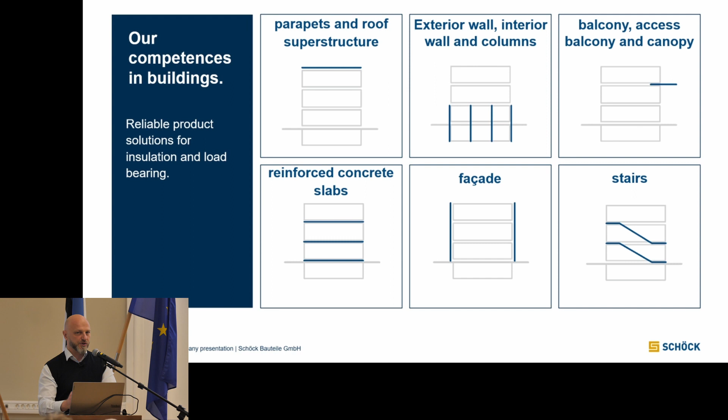The last gap which we closed last year is the product for thermal insulation of columns, where you don't need to wrap the column around with insulation material. You just put the thermal insulation element on top of the column, and that's how you separate it without needing thick walls. This was the last invention and the last product where we closed the whole thermal break issue around the house.

As you see here, we have solutions for parapets, for roofs, exterior walls - there are some examples over there - the facade, the stairs. For the stairs we have impact sound insulation. I don't know about the regulations here, but little by little, especially when investments are coming from Scandinavia, the demand for this impact sound insulation is coming.

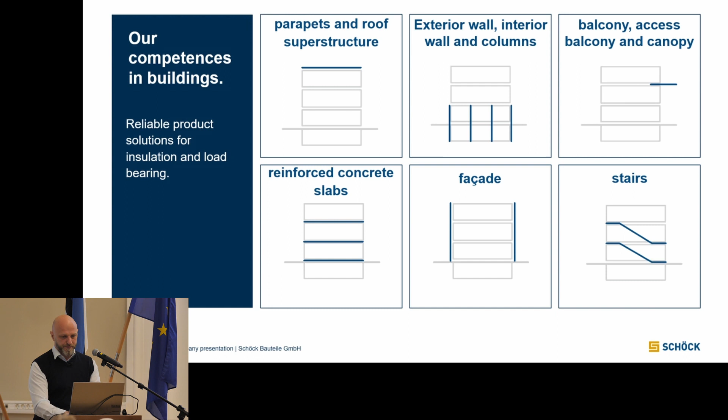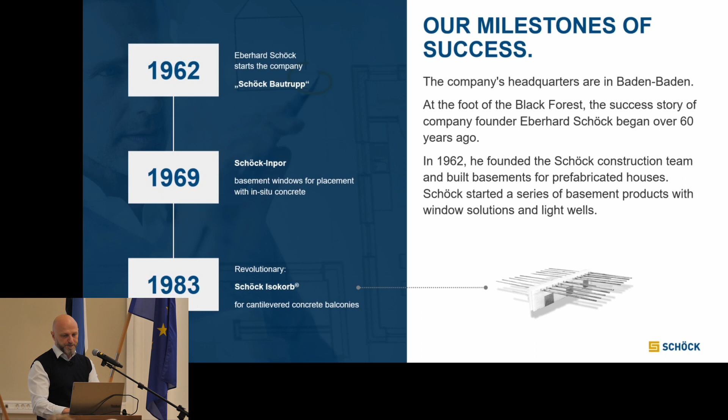In 1985, as I told you, another product group was created for impact sound insulation. At the beginning there were only a few products. Now the whole range has expanded, but I will come to this later on. Now we close the whole staircase and landings with our combination of products.

In 1997, the Schöck Combar, the glass fiber reinforcement, came onto the market. It was developed together with a Danish manufacturer. I don't remember the name off the top of my head, but it was the combination of our engineers and their know-how, and the product Combar was created. So you see, we have experience with fiberglass since 1997, so it's 25 years.

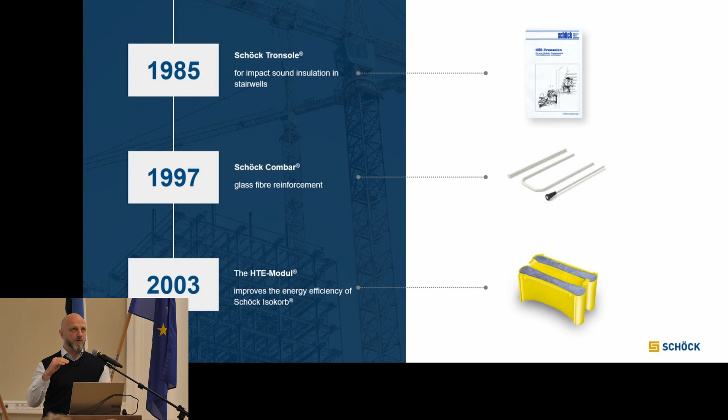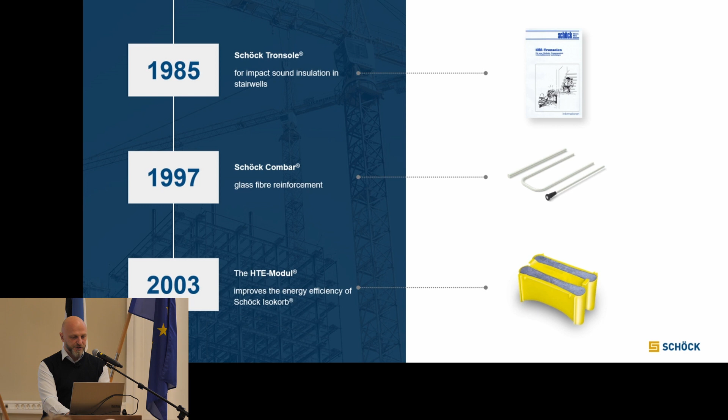Then in 2003, for the lower load-bearing elements, we no longer have the rebars at the bottom for the balcony connections. Now we have HTE modules. It's our invention, and maybe my colleague Carlos will talk later in his presentation about why and how it works.

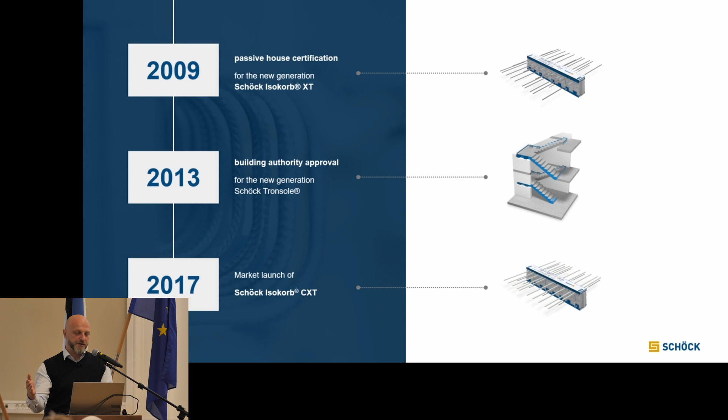In 2009, we got the Passive House certificate for the XT. XT and T are two different products, with 80 millimeter and 120 millimeter thickness. We got the Passive House certification for the 120 millimeter element. Then in 2013 we got the building authority approval for the Schöck Tronsole. And in 2017, the latest, 7th generation of thermal breaks for concrete-to-concrete balcony connections appeared.

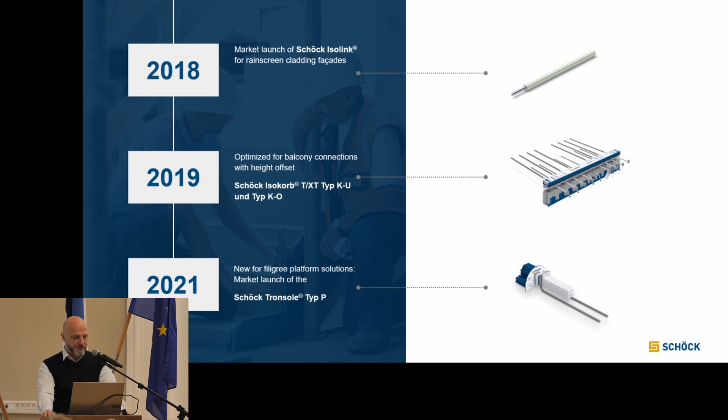In 2018, from the same material, Combar, we created Schöck Isolink. This is the anchor for rain screen facade connections. In 2019, another invention with short anchoring, which is very important if you design buildings or balconies next to hollow core slabs. And in 2021, the Tronsole Type P for impact sound insulation came onto the market.

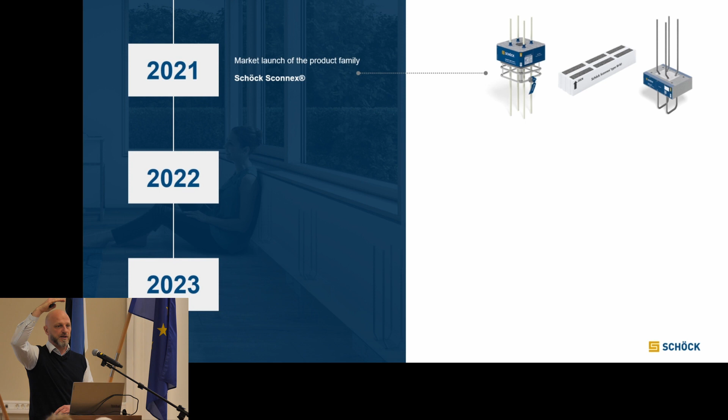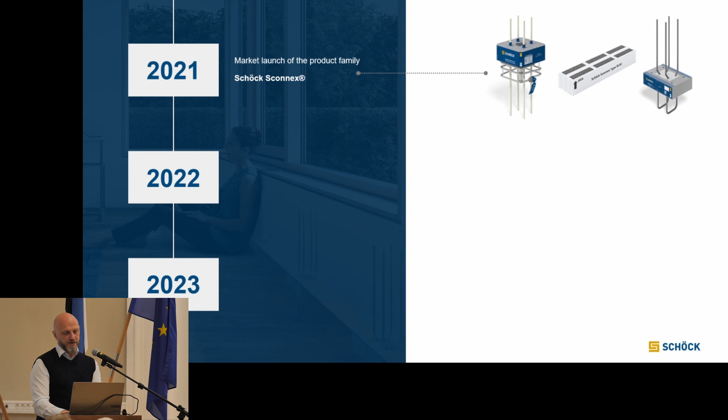As you see here, this product was the latest invention. This is for columns. It separates the column from the ceiling; you just disconnect. It has a Passive House certificate as well, and it belongs to the Sconnex product group. I would say this is something new that you will see.

During the company's existence, sales and production have expanded far beyond Germany, and now we have core markets: the DACH region, Germany, Austria, and Switzerland, plus France, Holland, the UK, Poland, Italy, and the USA. All the other countries are growing, and maybe some will turn into core markets as well.

Certifications are essential if you want to ensure product quality and be able to sell to different markets. As you see here, one of the most important markers is CE/ETA. Our thermal breaks for balconies, cantilevers, and roofs are covered by this certificate. All the guidelines are followed, and all tests were made and successful.

From the Passive House Institute we have two kinds of products: Passive House certified products and thermally efficient products. One has a certificate, the other has confirmation that they are energy saving elements. Another important thing: I believe some of you design projects in Scandinavia. They now demand the EPD certificate, and as you see, we have it as well. So if the customer demands it, it's here.

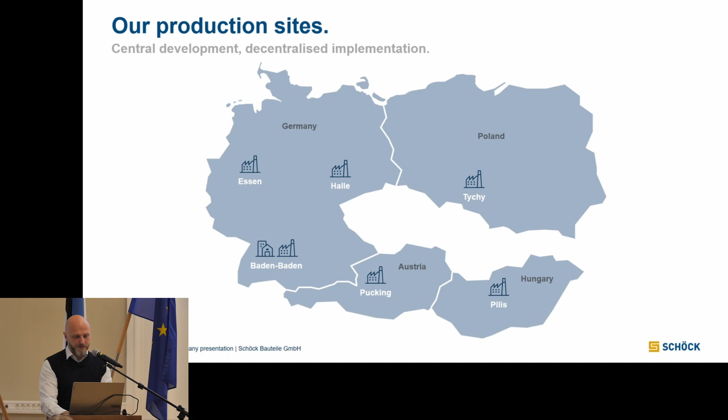Our production sites. The thermal break elements are produced only in Germany. The shear dowels and punching shear reinforcement are produced in Hungary. In Poland we have only assembly. All the elements are supplied from Germany, and according to the customer's needs, they are put together.

So what challenges do we face? Since 2021, the low energy standard of the EU building efficiency directive applies. I know you have a little more freedom here in designing and adopting solutions, or using site solutions, combined or welded on-site. That's not the case in Lithuania anymore. But the requirements are slowly leveling out, and everyone is starting to pay more attention to durability and sustainability. We believe this is the future for everyone.

Two-thirds of a private household's greenhouse emissions are caused by heating. Yes, we should protect the environment, but nevertheless, there are other important topics to mention. As you know, the price for oil and gas, and energy in general, went up. And one of the solutions is to reduce the heating to 17 or 18 – not a solution, recommendations, I would say. To reduce the heating to 17, 18, what does it mean structurally speaking?

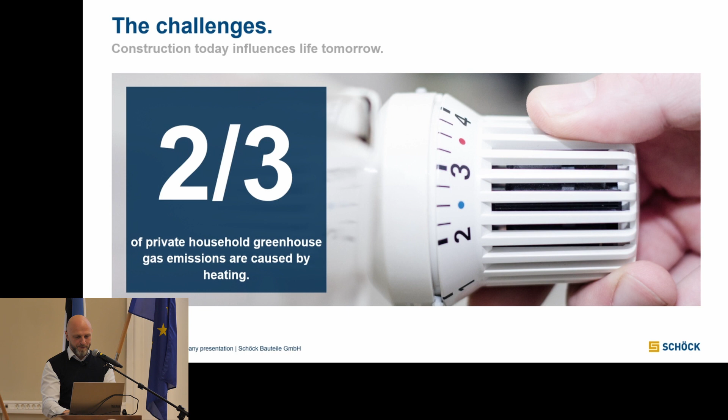The cold bridge stays not that far from the wall. It comes a little bit inside the wall, and we have the dew point closer to the ceiling, and we have, let's say, more problems when it comes to cold bridges, because the whole temperature level is reduced and the cold temperature comes into the building.

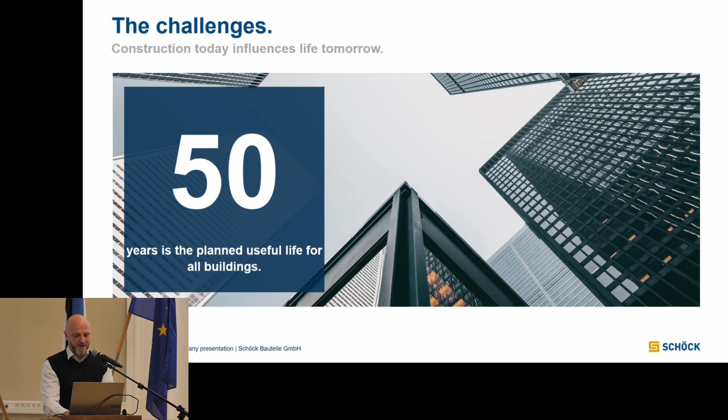This structure should be designed to hold for 50 years, so no one can make weather forecasts for 50 years, but structural engineers should think about the building lasting 50 years at least.

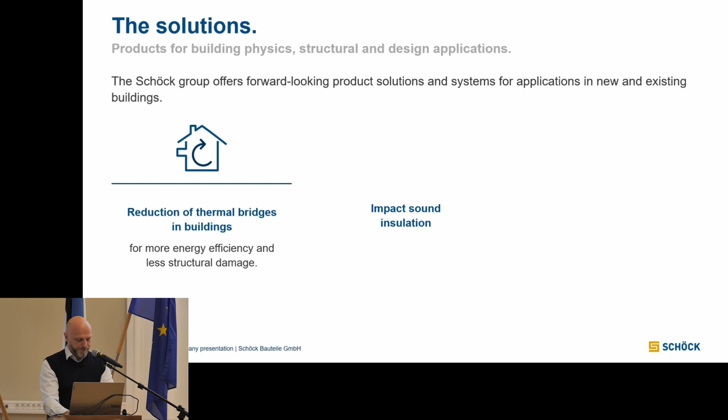So what solutions do we offer? One of them is reduction of thermal bridges, then impact sound insulation. Okay. And the last one, no, why is it? Okay, whatever. And the reinforcement, the Combar.

So how do we support the engineers? We develop and continuously improve our existing products and develop innovative materials. For example, Combar, we use it in a wider and wider range of products. We simplify the work process, solve complicated questions of the buildings, improve the quality of the building, and reduce the building time. Actually, it's very important to reduce the building time.

Because here in Lithuania, Estonia, and Latvia, as in Scandinavia, we have on-site assembling of the elements. All elements are precast in the factories, and they just want to assemble everything as fast as possible. So we have some inventions to attach the balconies to the walls without any wet processes on the building site. So it's a very fast, very convenient, and reliable solution because it's stainless steel.

What is important for the engineers is the calculation. And we have an online calculation tool for the thermal calculation. You can put in the balcony, the wall construction, component structure, and then the Isokorb element, and you get a rough estimation of the thermal transmission.

For developments where the Schöck Isokorb elements will be installed, we use another software, Antherm, but this is on our side. The designers just send us the task, and we do the calculation for the project according to needs.

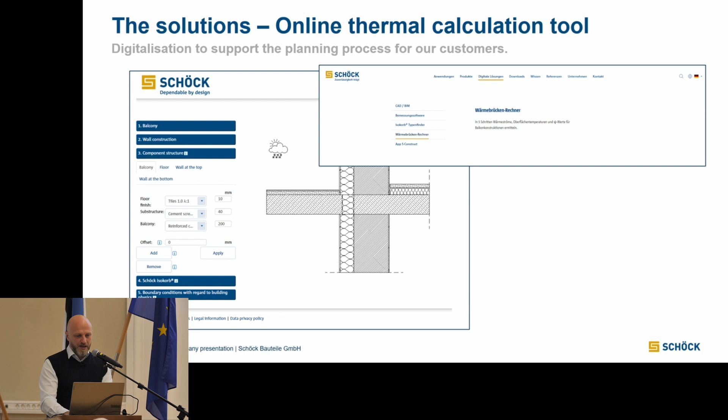Yeah, this is how the output looks. Actually, it's free of charge. If you want to use it, you can use it online just to play, or to give the customer the results and the report for the project one way or another. Not everything is combined, not all materials are there, but you can use it if you want. Just go to the German website and then switch to the English language.

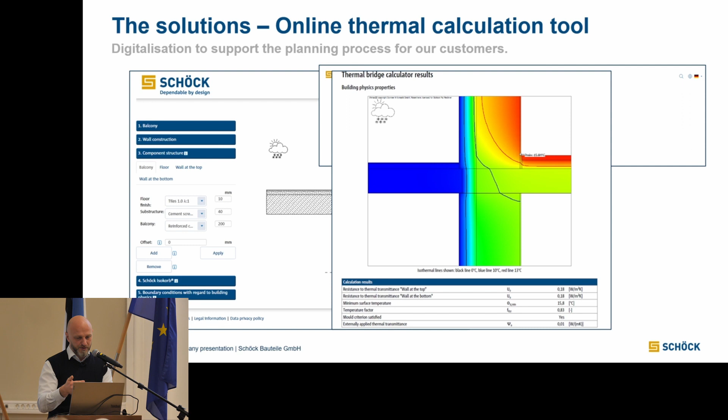Another thing which is very important in the Baltics as in Scandinavia, for those who are designing projects in Scandinavia, this program is very well known. In the Tekla Warehouse, we have two components for Schöck Isokorb, and the Schöck Isolink for sandwich walls, the fiberglass connection for sandwich walls.

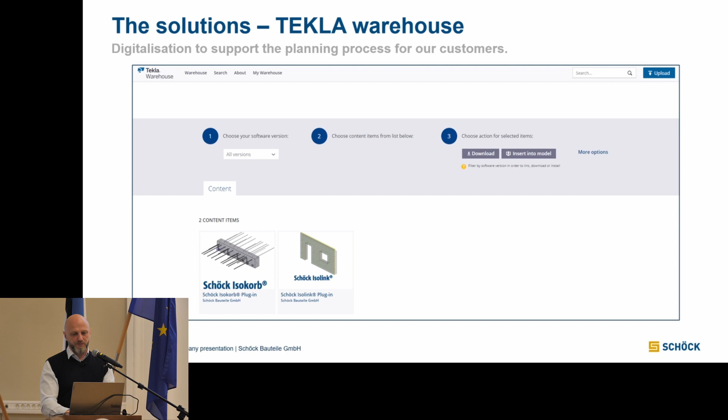And I heard already from some of you that sometimes it's not possible to install an update. So if you already use the software, and maybe some of you do, and you want to update it, just delete all the old files and then install the new one. Delete the whole folder which includes whatever data you have from the Tekla Warehouse and install the new one. Then it's supposed to work. If not, just give me a message.

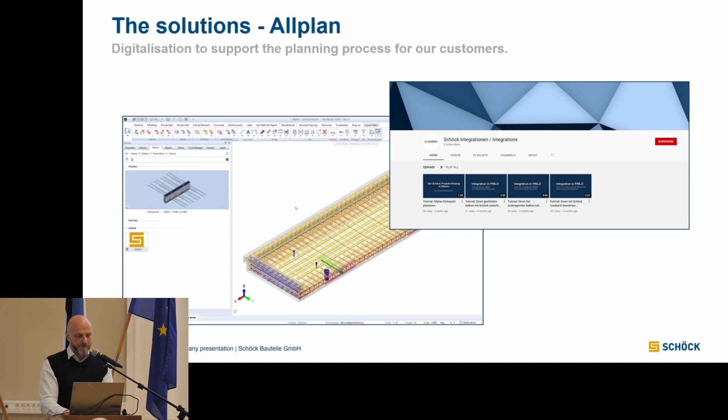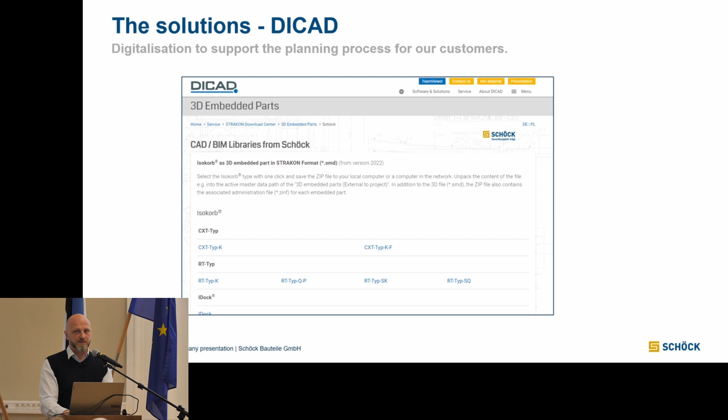Do we have some people here from a precast factory? No? Only designers, architects? Okay. So, nevertheless, we have the Allplan software for the factories, which makes the work more efficient and faster. Then DICAD, I'm not sure if that's the case here. Someone using it? No, Tekla maybe. And the Schöck home software.

So here you see we have a bunch of different programs. These are free of charge. You can download them from our webpage, from the German one again. But when you install it, you can choose the English language, or I think there's Russian as well.

So here we have Beton. I think you understand this is the concrete-to-concrete connection. Here Stahlbeton, Stahlbeton is the concrete to steel, and this is steel to steel. And this is the punching shear reinforcement and the Schöck Combar.

There are more programs to choose, but if you do your own calculation, you can download it for free. If you are overloaded, you can send the task to our partners as well, and we do the calculation, let's say the preliminary calculation. The only thing we need is just the cross sections and the loads, preferably in DWG.

This is how this calculation looks from our software. This was made for the cantilever 3.355 meters. You see here always in red the deflection of the balcony, including the element. Okay, this balcony is on the columns, so here you have the loads. Here is the element, and all dimensions are shown, so you can double check it.

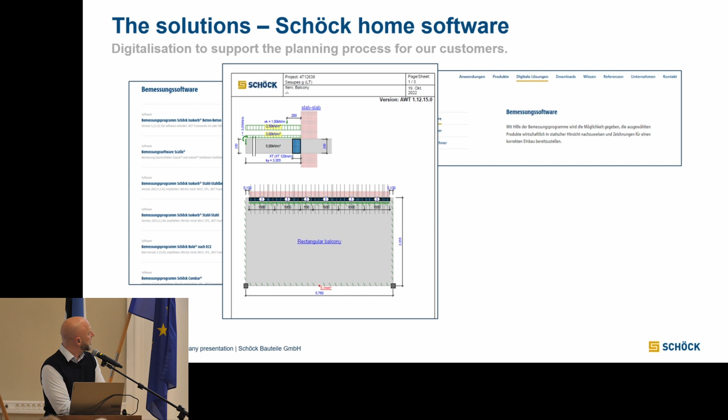And then you get the utilization of the elements, which is quite important. This time we have 86. Some precast factories which are working with the Scandinavian market demand 80%. And some private house builders, let's say 95 or even 100.

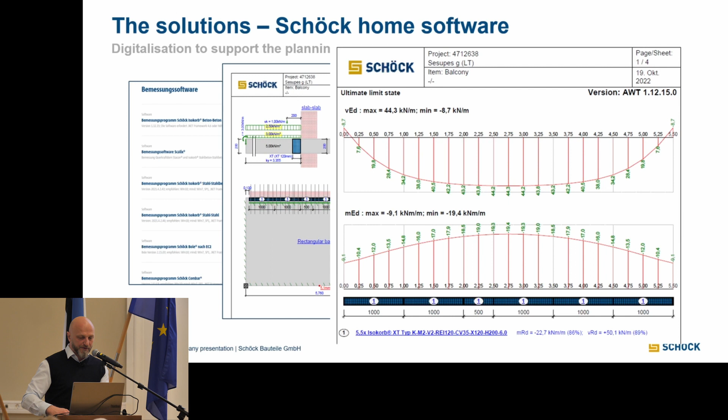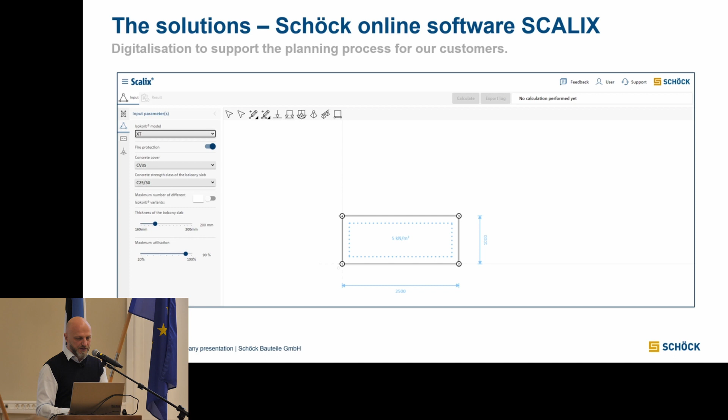Another software, which is an online tool, is the Schöck Scalix system. This system includes two modules for the balconies. Here you can calculate more tricky ones, not only rectangular balconies, but trapezoid or some oval. This is possible. And the other product is the heavy-duty shear dowels. You can calculate the seams with those dowels as well. The only thing you need is to register.

Another important thing: for those who do the layout drawings with DWG or BIM-CAD, we have the library online. This is a very useful tool for the Schöck Isokorb, Schöck Connex, Stacon, Dorn, and Schöck Bole and Tronsole. I will explain later on. These products seem to be the same or similar, but they have differences.

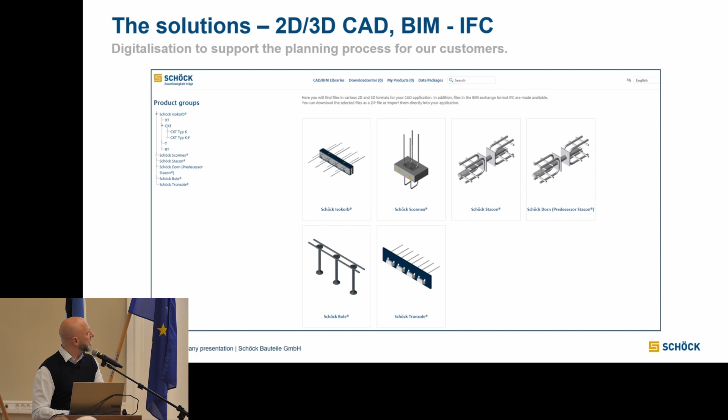So this is how the inside of the library looks. You have a 3D component, 2D or BIM. You can choose whatever CAD system you need, put it into the download center, and you download the whole bunch of elements you need for your design, for your balcony, for the layout.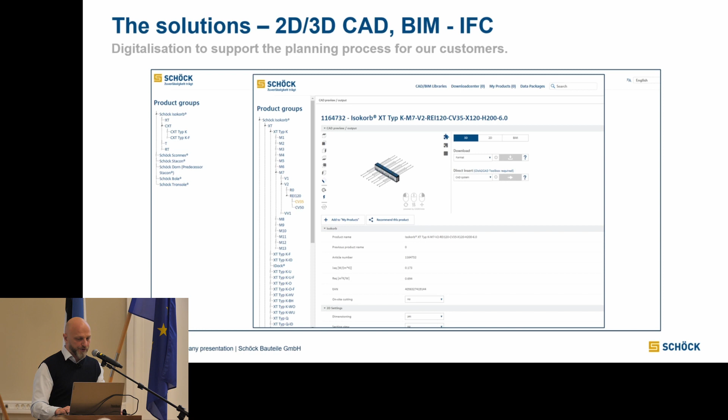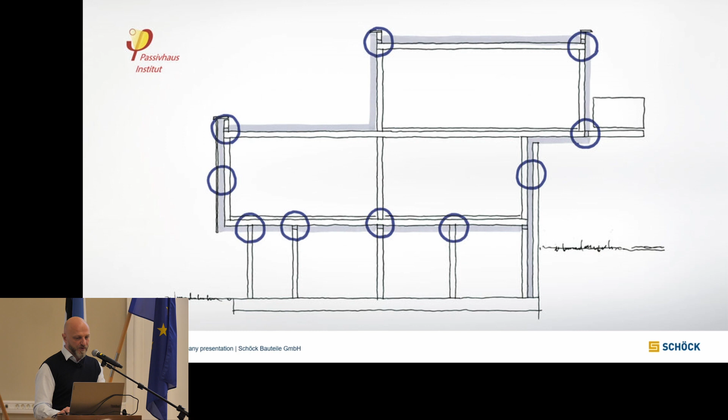Now about the products. You see here a small building, but it says a lot. How many different products do we have, and where do we separate the cold part of the building from the heat or energy losses? That's the product which I mentioned before, this Sconnex Type P. This is how it looks. By now, we have this product only for columns 250 by 250, I think, yes? But the other sizes are in development.

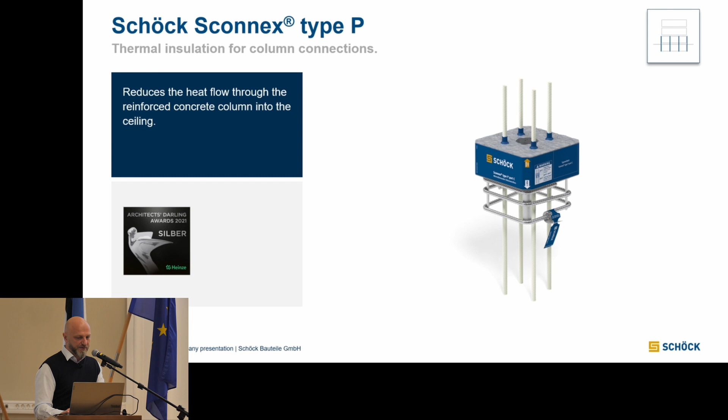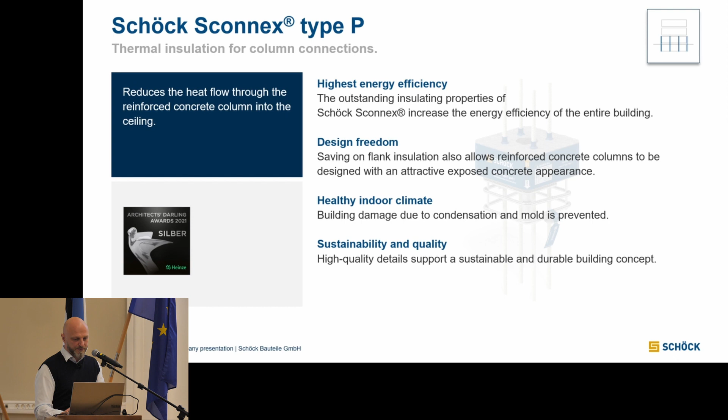This one is mainly for private houses. High energy efficiency. It has a passive house certificate, healthy indoor climate, sustainable, and quality guaranteed. Another product, Sconnex Type W. I think some of you may know this. This can be used for the separation of walls from the ceiling, above the column or below.

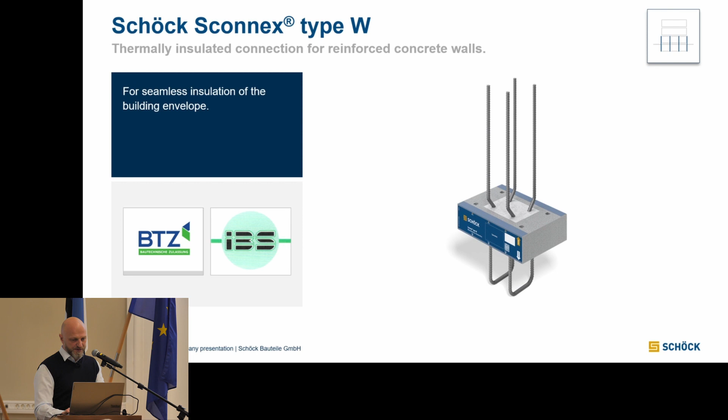Type W. This one separates the wall as well. And the Type M. This one is used for the perimeter of the house to separate the walls from the ground, from the earth.

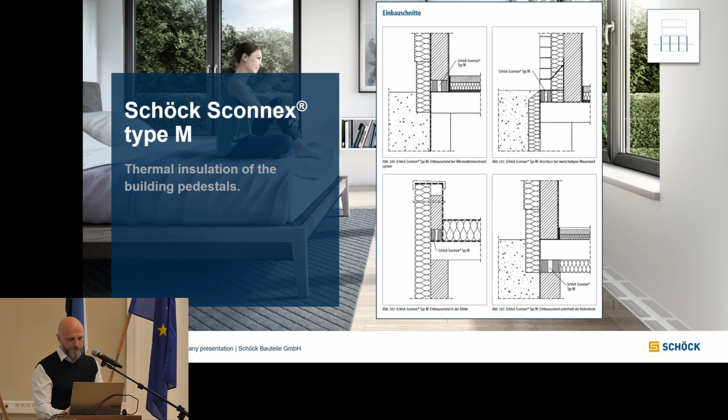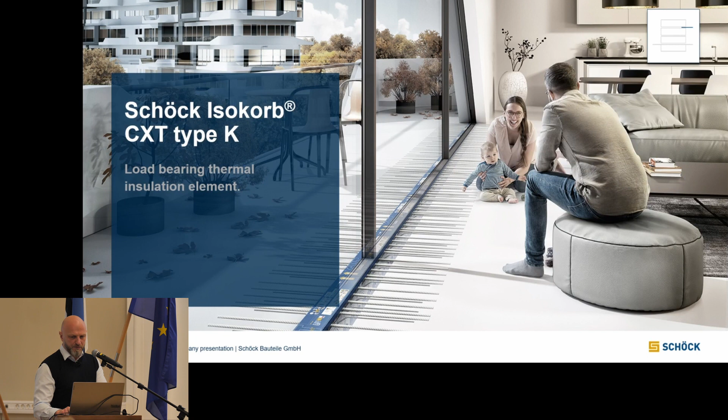And now we come to our main product, Schöck Isokorb CXT. This product, which is shown here, has reinforcement made of fiberglass. The only steel reinforcement here is for the shear, as you see. The rebars going through the insulation layer are always made of stainless steel. And here for the tension we have the fiberglass. So it's the warmest possible connection on the market at the moment.

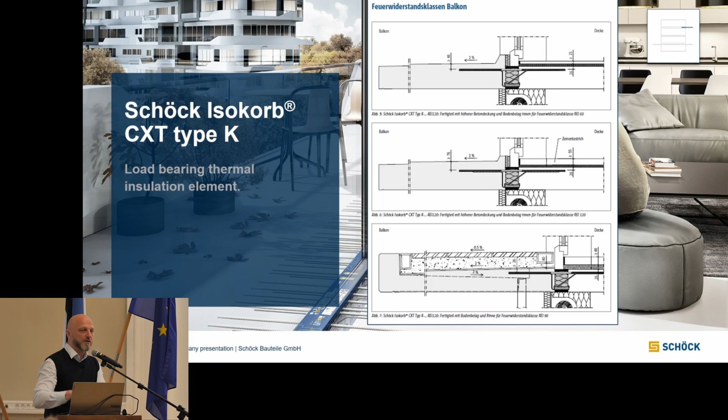Actually, there is a sample there. You can have a look later on during the pause. The one issue you may have with this element is the fire resistance and the cover layer, because it's much lower. The glass fiber reinforcement doesn't corrode, so you have less cover layer on the top of the balcony.

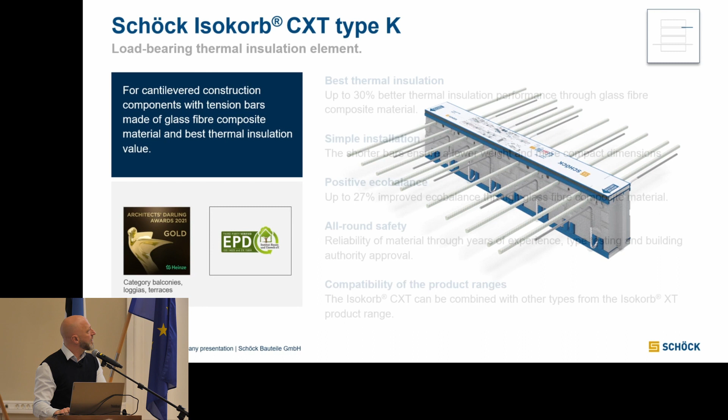Okay, Schöck Isokorb XT type SK and SQ actually. These are the products designed to use for the steel balconies or steel structures or timber balconies. We have here reinforcement anchored into the slab, and from the outside we have the steel or concrete. Yeah, it may be concrete balcony as well with the steel profiles inside. So underneath we can produce the anchoring into the wall.

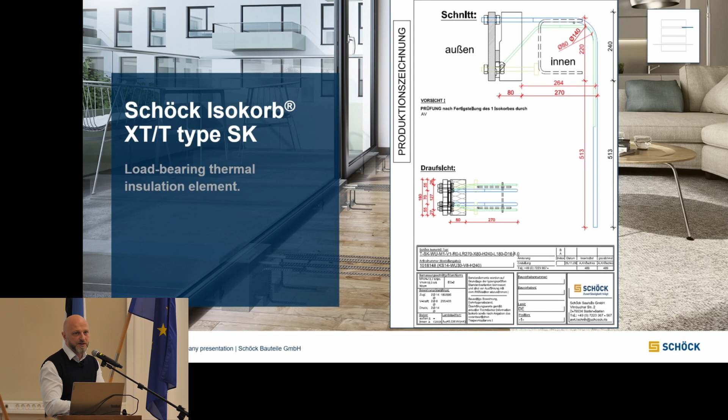The reinforcement can be bent down or it can be bent up, but never bent to one side or another side. There was an issue in Riga. The designer didn't ask us and designed to the sides, and then we had to change the whole construction. What I want to say with this drawing is that we have many products, but not all of them cover every need. So we do specials as well if needed. Yeah, this is the product.

Another product, which is, let's say, the third grade: we have concrete to concrete, concrete to steel, and this one is steel to steel. When you need to separate the beam coming from the inside to the outside, or to have a cheaper solution, let's say for a small roof, you can use steel to steel connection. It can separate the beam and can be connected to the Peikko weld anchor, for example. Peikko weld anchor into the wall, and then you separate and connect the beam through the thermal break steel to steel connection.

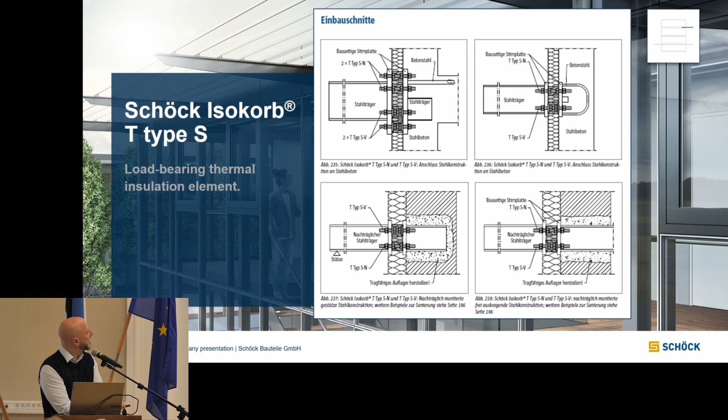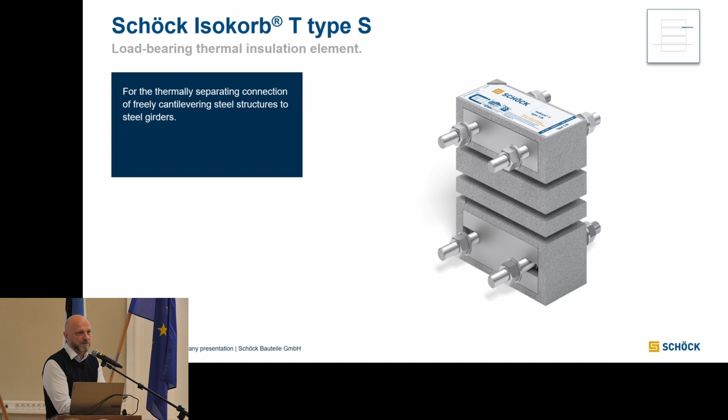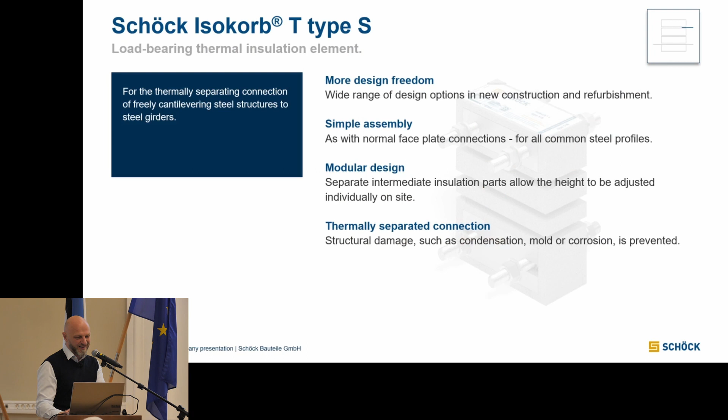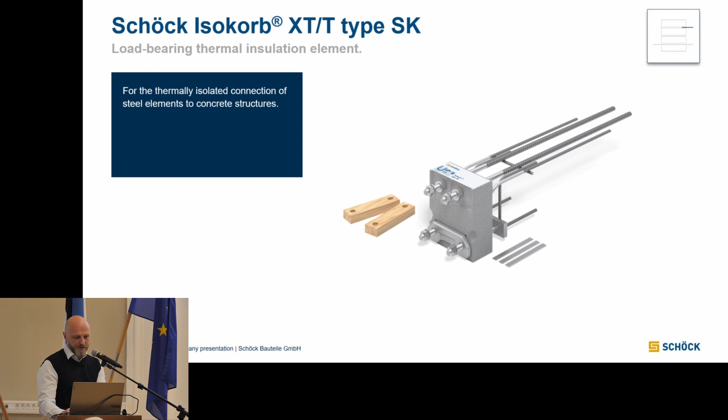For renovation, we have one product which is called RT type SK, but mainly I always offer to use this one because it's much easier to install: you just make the gap into the existing slab, put some additional reinforcement, and pour the fresh concrete. This one is more complicated because you need to drill the holes in the exact place, sometimes 80 cm, even up to 1 meter depth, and put all the chemistry inside. But it's useful for conversion of an old building, like an office building into an apartment house, where a balcony didn't exist before. So you can attach the balcony and bring more value to the apartment.

One more solution for the parapets, type A. And now we come to the Tronsole, the impact sound insulation product. As you see here, we cover everything around the staircase and the landing. In total there are 7 different products, but usually we use a combination of 2 or 3. It's enough; you don't need to put everything we have into the staircase. There is no software, unfortunately, because there are too many different solutions, so we go according to the technical information or manual. This is the connection for the staircase to the landing. One of the parts, this part or this part, should be cast on site.

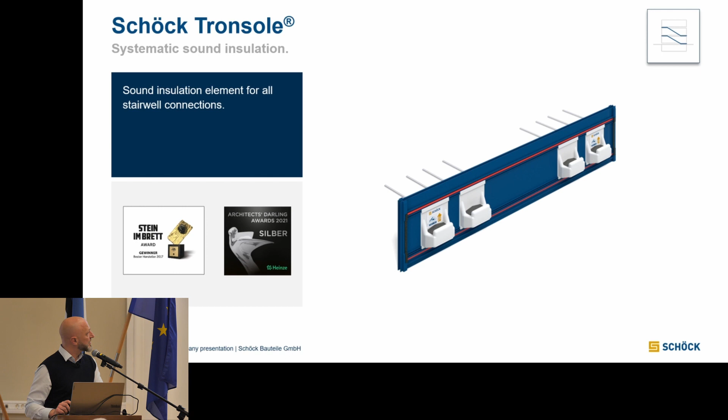I don't need to explain a lot for you about this. I think you all know Peikko with this solution. So if you decide to have an alternative, we have an ETA certificate for this product as well, and design programs. So feel free to design it and offer it to the customer as an alternative.

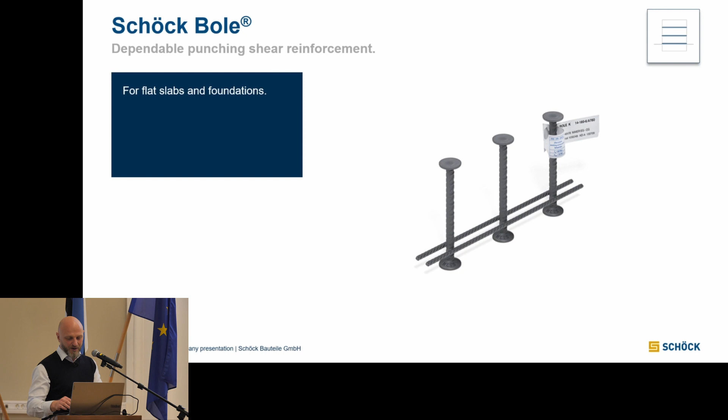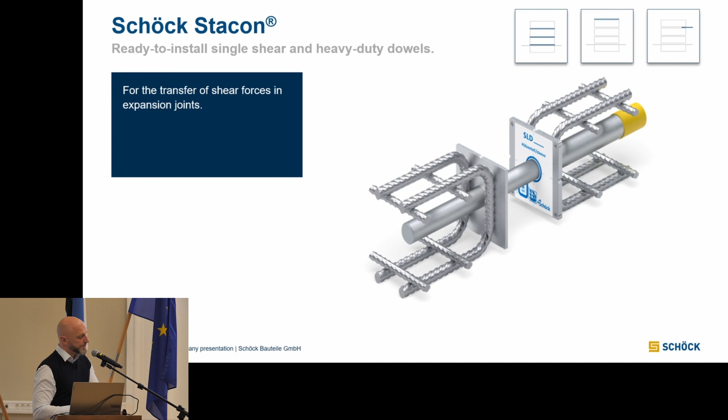Now I come to the product for the heavy duty shear dowels. This is the product Stacon and the Dorn. This is the old Dorn. The old Dorn had a round dowel, and the new one has a square one. It has more load bearing capacity, and it already has the ETA certificate. What is very important to mention is that these products are made 100% of stainless steel, except these small parts, which are not important. It's not just covered with stainless steel, as some of our competitors do. It's all made of stainless steel, so there can be no damage if some vibrations appear or some damage in the surface. This is the main difference.

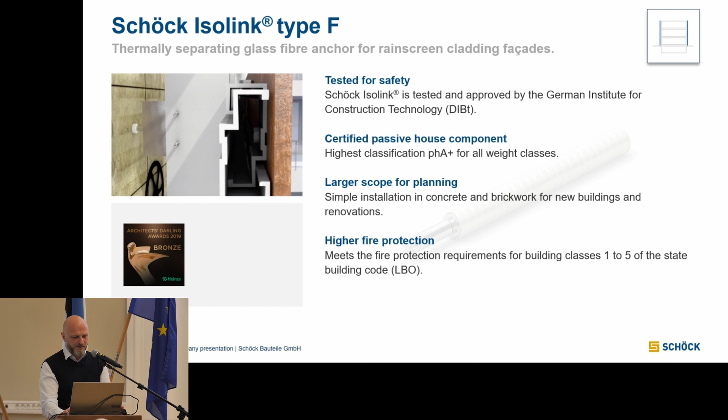Yeah, DIBt certificate, passive house certificate, and so on. Actually, with these kinds of products, especially when you use the steel anchors or the aluminum anchors, you can use less insulation material, because this glass fiber connection shouldn't be treated as a connection, since it has a thermal transmittance of 0.07 or something.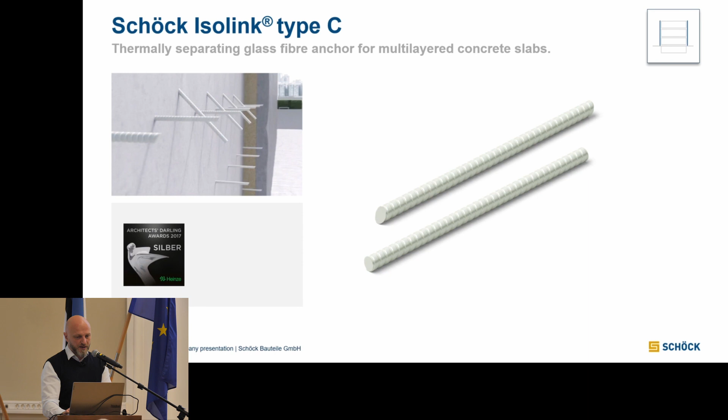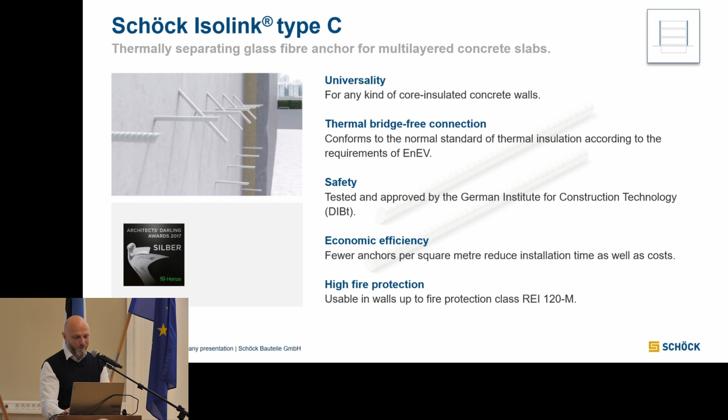The same product, different use, for the sandwich panels. There is a mock-up sample over there. We have spoken with some of you already about it. And we will have another colleague coming over with a more exact explanation of how it works and why it's a better solution than the solution we have nowadays.

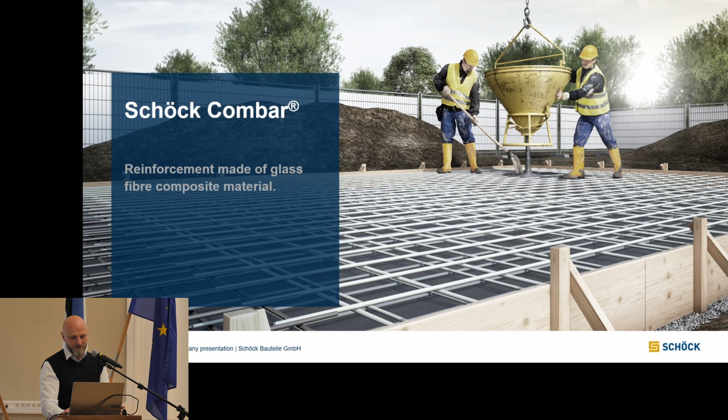The Schöck Combar, this is the reinforcement, the product which I explained to you before. Some of the engineers are asking straight away about tensile forces and so on. So here you have more technical data about the product. This is for the straight bars. This one is for the bent bars. Bars can be bent only in the factory. There is no possibility to bend it afterwards. So if you need some special design, this product will not replace steel so far, even stainless steel.

The prices went up, but fiberglass is still more expensive, especially the one which is supposed to hold the structure for 50 years or longer, I mean a tested and certified product. But for special projects where steel cannot be used because of corrosion next to the sea, or some aggressive environment, or some electrical transmittance, this product can be used.

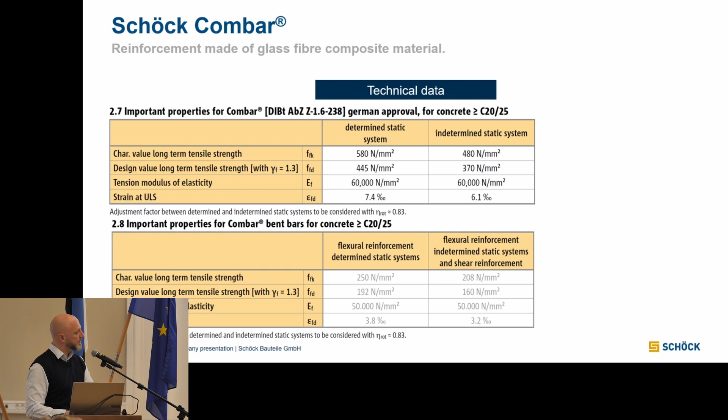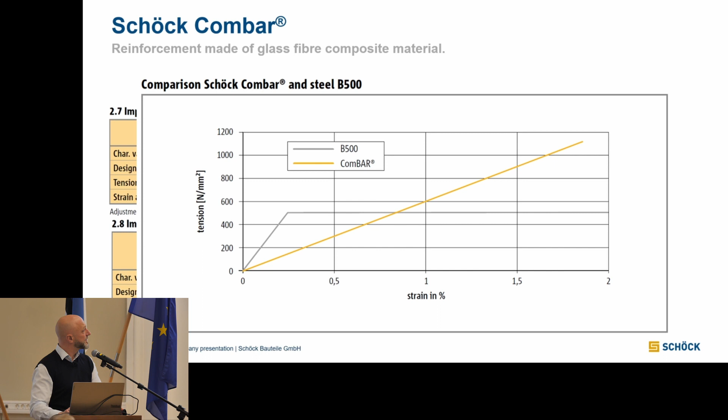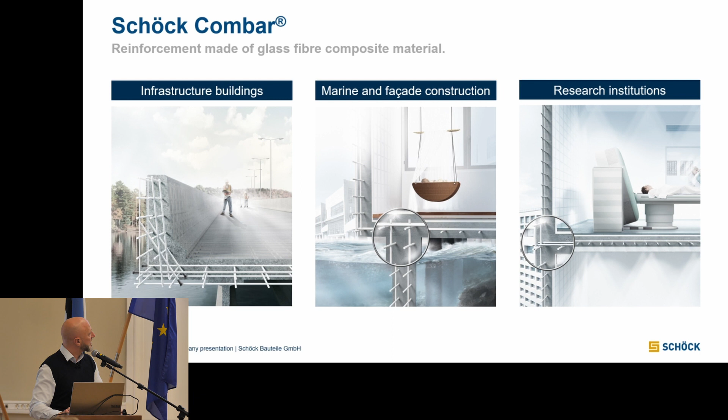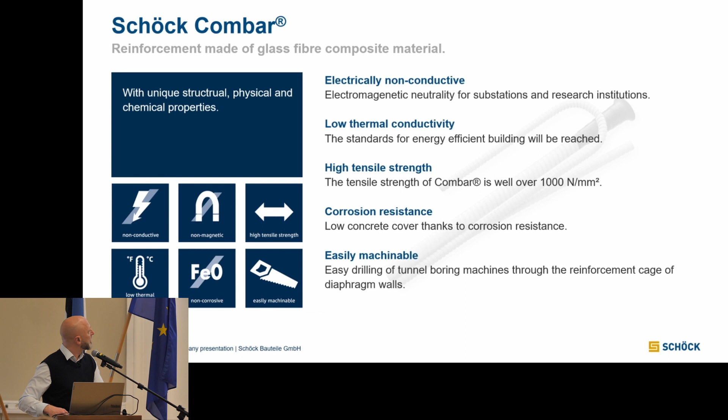So here you can see a comparison of Combar with B500 steel. These are the main projects where it can be used, where normally steel can't be used because of corrosion. Non-conductive, non-magnetic, non-corrosive. This is what you should remember about this product, when steel cannot be used.

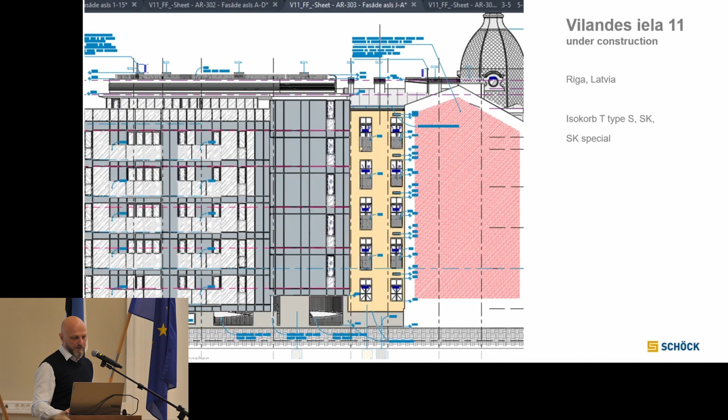One more project in Riga. These are the regular balconies. But what is important to mention: when you use the concrete balcony, instead of wrapping, you can just attach whatever railing you want, and you don't have any drainage issues or hidden defects.

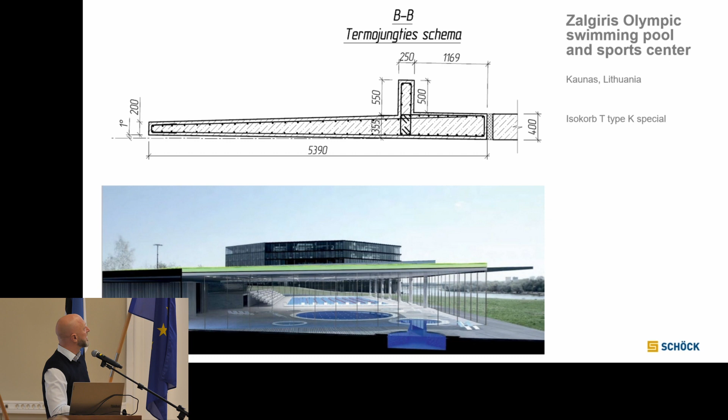I'm wondering if I will manage to visit the building site tomorrow morning. What? I can come today? Okay. Is Marty here? Not yet, but he's on the building site, I think. Okay. Yep, I can come today if we have time.

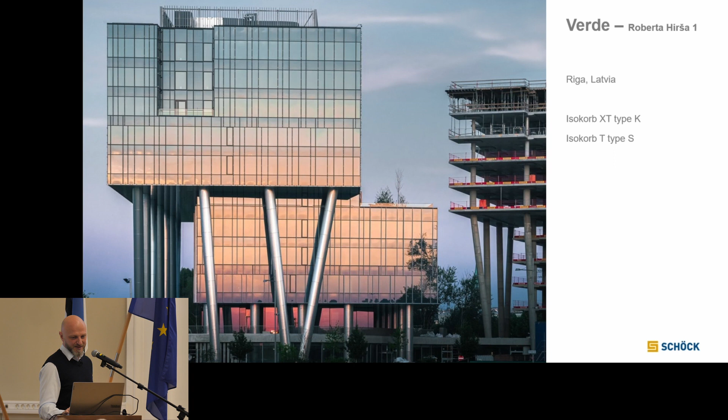And one more project in Riga, where type K and type S were used. Yep, that's it. I went through all the things a little bit early. Maybe you have some questions or ideas.